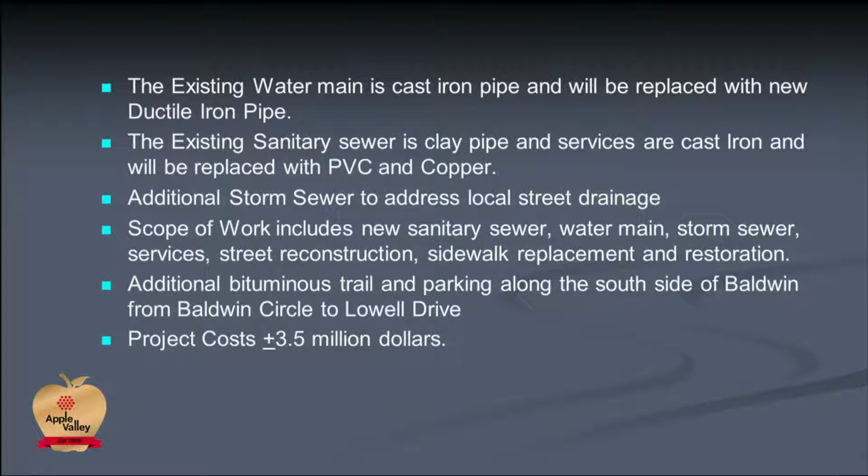Project cost, this is approximately $3.5 million construction project. And I really want to key in on something very important as part of this project, not just nuts and bolts. Like I mentioned, we bid and awarded the project for 2019 construction, so it's under contract to start. Funding for this project is derived from the city's road improvement tax levy, so you are not assessed.

There are no assessments. There are no costs to the residents. This is something our mayor and city council has pressed as a very important element to the city of Apple Valley. We do like to stress that because sometimes that's confusing to people that move here. That's a hard concept to get a hold of, and it's actually very rare that cities do not assess for this level of work.

So there are no special assessments, just to be clear. We have had people come to meetings and want to know what it's going to cost or what their assessments are, and we have to reiterate that maintaining no assessments is an important goal of the city of Apple Valley. So if anybody hasn't been at the meeting, like your next door neighbor, please just remind them, because sometimes they don't believe it, but it's really true. Yeah, that's a key point.

So, project area: you've got the mailers, we've got maps. The project limits are Baldwin up to Elm, over to Hopewell, everything in between.

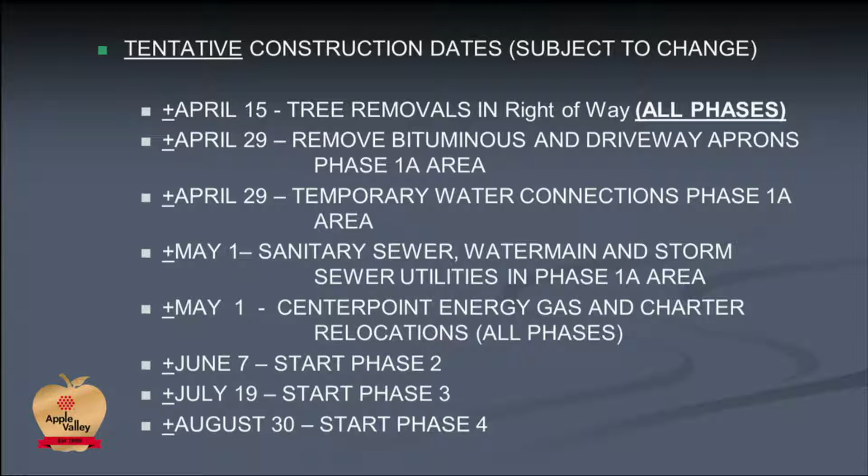And then, like I said, with the big picture, those are some of the tentative dates for you on phasing. So if you know where you live, you kind of have an idea when the real heavy stuff is going to start for you. During this whole process, one of the keys, we're going to be notifying you in advance. And in advance can mean 1 day, 2 day, 3 day, 7 day. It's going to vary depending on the type of work. But you are going to receive a lot of notifications from Tom.

Door hangers, we've always found we use websites and social media. We've done a whole bunch of stuff. The most effective to this day, even in a day of technology, is to put something on your front door as fast as we can - still the most effective means. So a lot of you probably go in and out of your house to your garage, and you may not even use the front door.

We communicate to Tom what your needs are. Tom's still going to do that, but if you have an individual need, let him know. Communication is key. Go to Tom. Go to Tom for everything you can.

You're going to see a lot of notices. There's going to be different notices that when we're pouring concrete, maybe you can't get in your driveway for a little bit, or this deep excavation, so you're going to have to not be in the 200 feet of roadway for an 8-hour time, or there's going to be a variety of notices for you guys. But Tom will be notifying you pretty regular. You're going to see a lot of them, and that's the key. We want to communicate with you in advance of things over and over, and if there's an issue, Tom's going to be the person you're going to want to communicate with, and he's going to communicate back.

You can go on the website. Usually website, we post weekly. It's not daily. Last year what we've done is after we hand out the notice, we'll go ahead and put it on the website. So, if you see your neighbor's got a notice and you don't, and you want to know what's going on, you can go to the website and it'll be there.

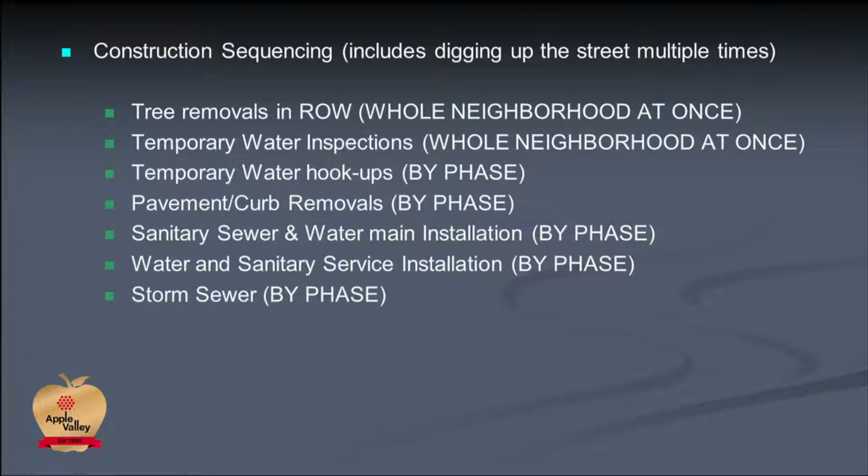I do have to mention that because it's something we take for granted as engineers that deal with this a lot, but a lot of folks have not seen that or been a part of it. So it is part of the process.

Once the utilities are in, then what we do is excavate the street. There's a lot of poor soils between the pavement and that. We'll excavate those and get those out of there. And that's really from back of curb to back of curb, and we'll do that by phase. Then we replace that material with a new aggregate base.

Nothing's changing on the street width, so we're keeping all that, the 28 foot. Once the aggregate base is down, then we have to pour curb and gutter. One of the things I want to point out, currently you have the rollover curb and gutter, it's kind of flat. All of our city streets in the neighborhoods that exist have been changed to what's called a B-style curb. It's the stand-up curb. So we'll have a nice drive apron and a nice opening. It makes plowing and parking and maintenance much easier than the rollover stuff. So it is a big change, and it does function a lot better.

So in the older neighborhoods where people aren't moving driveways like new neighborhoods where you don't know where they're at, this is a common changeover.

Sidewalks, like I mentioned, they're going to be 5-foot replacement instead of existing 4, and it's held to the inside of the road, so it won't be encroaching back towards the house side. It'll be encroaching towards the street side.

5 foot is actually, we can get by with 4 foot for ADA, but 5 foot maintains better. You can walk by people without feeling scrunched. 4 foot gets really tight, and you know how it is in the winter when you don't fully snow plow it or use your snow blower on it. It gets narrow. 5 foot is nice to get by, so it is an improvement. And we hear a lot of people do. It's hard at first, like, oh, I got to shovel more sidewalk, but in the end, actually, it is a much better amenity to the neighborhood.

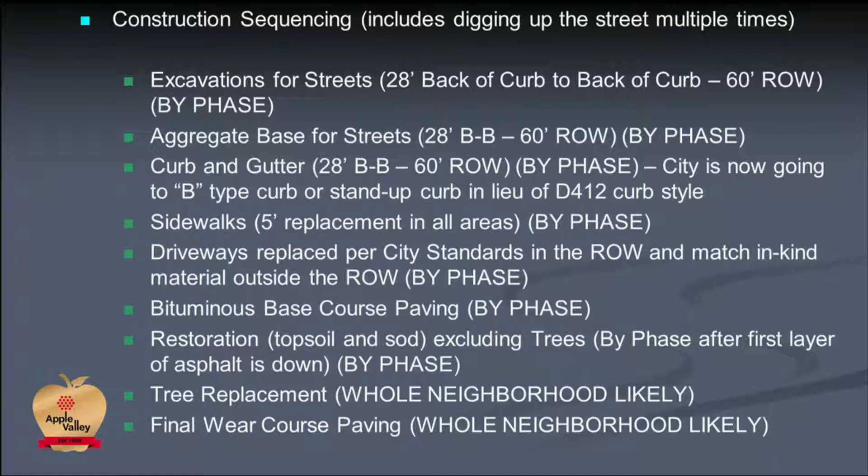We like those planted outside of the right-of-way on the replacement. Keenan has a sheet for the species, very critical. As some of you may read the news, the city of Apple Valley has emerald ash borer. It is an invasive species.

One of the things I think our natural resources group does a great job with is they promote diversity of trees. We don't want to go back into the neighborhood and plant one type of species over and over, because there's the risk at some point you could wipe everything out. Like emerald ash, you'll see areas of town where the whole area has to be cut. Keenan and his group has a great list of diversity of trees that work well.

So that's nice, think about that when you do your replacement. Get those forms back into Keenan. It is nice, we have a contractor with a nursery list, so we've got to make sure all that stuff's available early. The earlier, I think you had May 1st. Yep, the sooner we can get what you want for a species, then we can make sure we get all that stuff addressed with our contract with them.

You'll be out at the Eastview High School at the Home and Garden Show on Saturday.

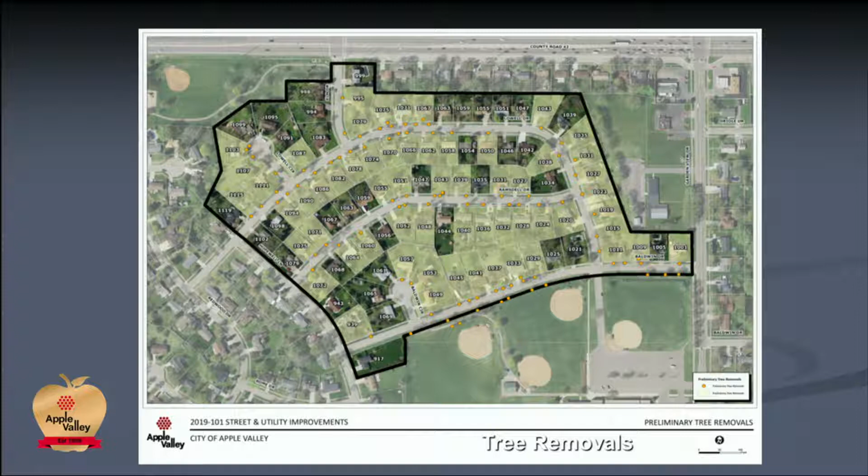So we're going to replace those with diversity when we do the trail. Are those lilacs? No, I don't believe so. Oh good. There is a couple trees in there that we can walk through in detail, I don't remember each specific one, but yeah. Are the yellow dots the ones you're referring to? Yeah. We've got a more detailed plan that shows some of the ones that have to go.

Tree replacement forms, Keenan's got those here. Make sure you get those in, those are important. I do want to get into some of the contractor items, more than just the specifics of the schedule.

We do have working hours: Monday through Friday 7 a.m. to 7 p.m. for equipment running and disruptive activities, Saturday 8 to 5. No Sundays and no holiday work allowed.

There are times that we do grant a little variance. There's been instances where if there's a large prediction of rain, say on a Wednesday, and these guys are in a really tough digging spot, we're going to make a decision to allow it to go. Tom will communicate. Sometimes we just have to bend the rules, but it's for the benefit of everybody. If we don't allow them a little bit of extra working time, we could have bigger issues. So there is time that we flex, but we only flex if we have to.

If you have concern about noise, talk to Tom. This is going to be a noisy, disruptive construction project, but talk to Tom and communicate that to him. We do have instances where it isn't working, but everybody does their best to keep this thing going. Like you said, we've got a short time frame, and it can be disruptive. We're not going to sugarcoat the fact that it's a disruptive summer season.

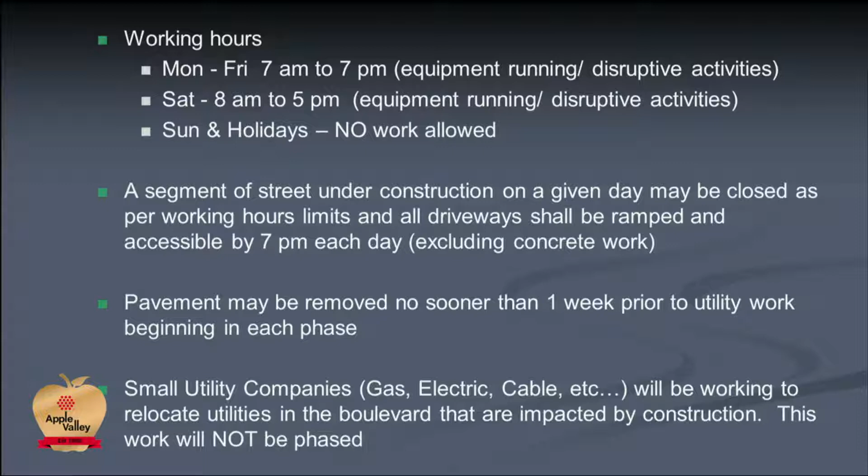Small utility companies, the gas and electric, will be working to relocate utilities ahead of us. One of our biggest delays on projects is having their stuff in the way, so they will be working in all phases to get out of the way. We can't have gas crossings and things in our way when they work, it slows things down and it's dangerous. So they will be working throughout the whole project.

One of the bigger items that have come up, and this is critical, Tom will work with you to coordinate private items in the right-of-way, such as irrigation systems, dog fences, shrubs, and pavers. They need to be removed by the residents prior to construction. The city is not responsible for the cost to relocate privately owned facilities in the right-of-way.

Our staff will send a notice to property owners ahead of scheduling, letting you know when that needs to occur. We give you as much time as we can. We understand it's a challenge to move things sometimes, and irrigation tends to be the biggest item. If you have shrubs or bushes you want removed, just communicate that to Tom so it can be dug up. Otherwise, do your best to get it out of the way in advance, and we'll give you advance notice.

In order to maintain not having special assessments, that's a cost the city can't keep reabsorbing if it's not public infrastructure in that right-of-way. So that's a big item, and it always brings most of the questions at the end: coordination of irrigation, dog fences, and miscellaneous stuff. But that's something we can talk with you individually about.

I do need to make a point about safety and access. This is a work zone. It will be disruptive. It's going to be noisy. There will be trucks, there will be dust, there will be vibrations and noise.

Please make Tom aware if there are special facilities, daycares, or special needs, sometimes people need access with special vans that ride low. There are all kinds of circumstances, so please communicate those things to Tom. The more we're aware, the better we can accommodate. So if there are special needs, let us know.

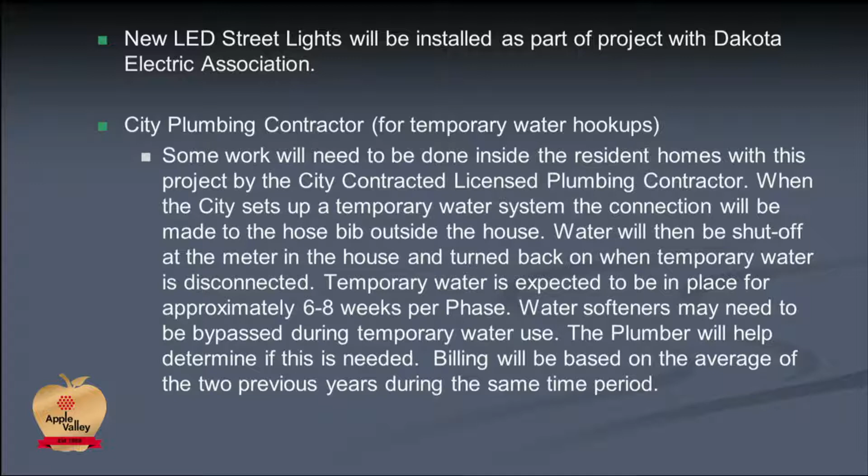Whatever time you're on the temporary water, yep, we'll keep track of when you go on temporary water and when you come off. So we don't do it for the whole duration of the projects, only during the time that you're on temporary water.

Garbage pickup. Garbage pickup is Tuesdays, and the contractor is responsible for the refuse hauler or the garbage company's accessibility to the container. So if it's under construction, your duty is to take the garbage out as you normally would. It is nice to get it out the night before.

I understand that this is an early pickup. Help them out because they have a system. You will get the same garbage can back. They have a system to make sure that your garbage gets to the refuse hauler. Your job is to get it to the end of the driveway like you normally do. And the contractor's responsibility is to make sure that the garbage hauler can get it away. It is a lot of coordination in the background, but it's important for you guys to understand that everything still functions. It just might be a little disruptive for a bit.

Mail is the other difficult one. We are going to provide a temporary mail delivery setup. We are working with the United States Postal Service. They tend to dictate the terms of the mail. We don't always have answers at this time, but we will work with them. They don't deliver in a construction zone. So there'll be some temporary mailbox set up, and I'll show you a map of where it worked from previous. They haven't finalized it, so it may move, but at this point we've got a couple locations.

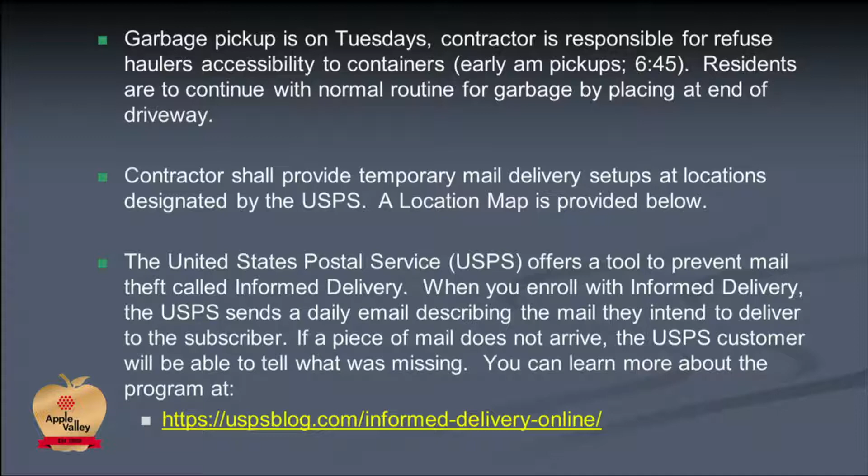If you would like that and it makes you feel better that you're going to a temporary box, a lot of people have said in the past it's a great tool to feel reassured about your mail. So we have put that out there. Our police department was kind of promoting this for a couple years too because they noticed that it helped with theft. So that's why we're bringing it back up. We haven't really had instances, but people get nervous when you have a band of mailboxes in one spot. So we like to put that out there.

Temporary mailbox locations by phase. So the post office has not signed off on this yet, but what we found is they want to stay out of the construction zone. They need a safe place to pull up, not in front of somebody's driveway.

When we put the temporary bank of mailboxes by phase, it has to be in a place that's safe for residents to pull up and get their mail without disrupting people's front yards. The two locations identified were one we used last year on the corner lot that worked really well—cars could stack up, it wasn't disruptive—and a side lot around the corner from Lowell that also worked. Those are tentative for now.

Tom will get you a very detailed map as we get that going. So locations 3 and 4 are down below, and 1 and 2 are up at the corner—the pointer doesn't show it well. The reason is, when we're disrupting phase 1, all those folks on phase 1 and 2 need a mailbox location, and we like to leave them there as long as possible. We don't want to move mailboxes repeatedly—we try to get duration so you're going to the same place. It's disruptive for the postal carriers and for residents to keep moving boxes around, and it's costly for us because we have to pay for all those moves.

So, the contractor will take the mailbox down and give it back to you—that's your possession, they don't store it. The reason we don't have the contractor store it is if it comes back damaged, or not in the condition it went out. So Tom and Jordan, you guys give them back to the residents, and you store your own personal possession. Can I take my own down? Yep, if you want to. We put the temporary ones up—just find out when they're going to do that so we can take them down.

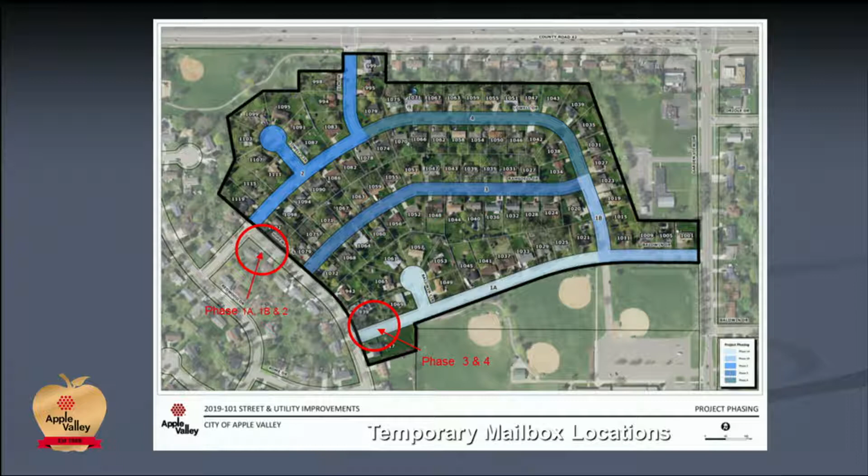Those were the bigger items I had. I know Jordan wanted to mention one thing about vibrations in construction—his insurance company says one of the biggest items that always comes up is vibrations and damage. So, Jordan, go ahead.

Evening, everyone, thank you again for coming. Looking at the map for vibrations, as Brandon mentioned, we will be digging past your house a number of times—it's all part of the process, but you will feel vibrations in your house. I always liken it to fireworks on the 4th of July: you see it, hear it, feel it, but it's far enough away that it doesn't harm you. Similar to the map, there's an alert zone in red and a perception zone in yellow—if you're in your kitchen and feel it, that's perfectly normal. The techniques we use are industry norms, not just here but statewide.

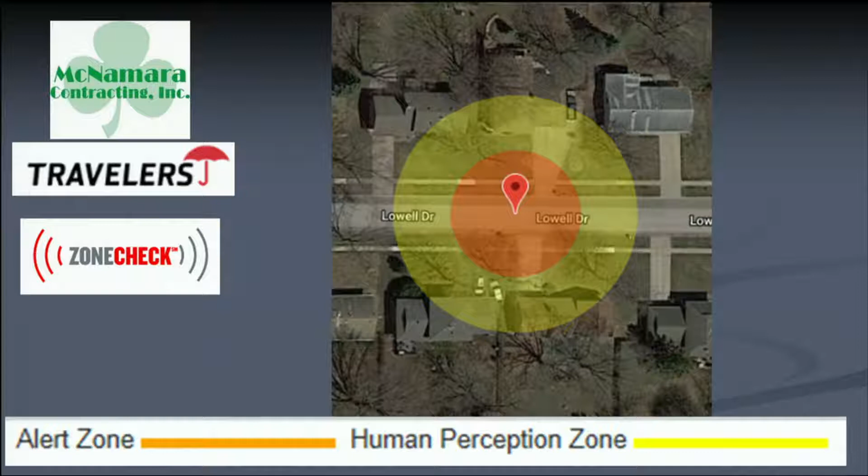If you have any other questions, I'll hang out a little bit afterwards. Otherwise, Tom is the main point of contact in the field. Just so you're aware, before the project even begins we video, photograph, and log everything we're disrupting ahead of time. We do get claims for damage—Jordan's right, vibrations comes up a lot, along with cracked sidewalks, which get replaced, and cracked driveways. We document that stuff. If we damage it, we'll replace it, but if it was already there we can't fix everything, otherwise it becomes open-ended.

So we do document a lot of things in advance. I want to show you some pictures of some of the things I discussed, and then after that we can open it up for questions.

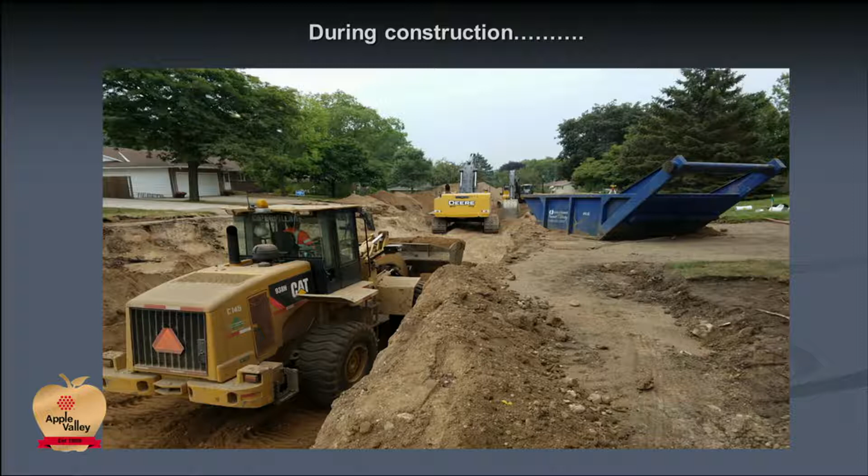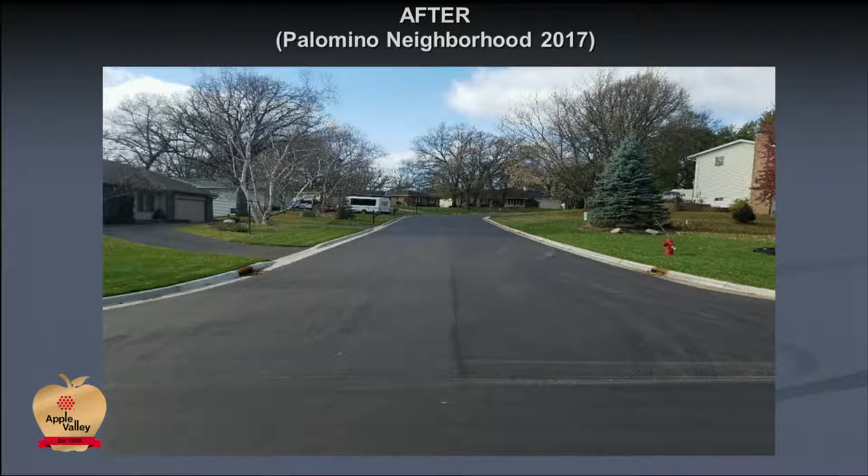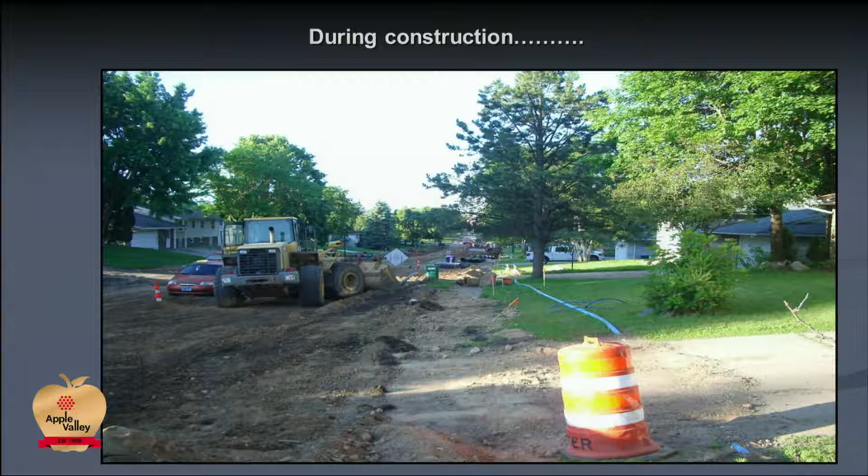The nice thing is this is when it's done. This is when I mentioned the city standard sidewalk and drive entrance, the B curb, the stand-up, sod, restoration, all those kinds of things. It will be a long summer, but it goes fast, surprisingly. We all commented it was a year ago to the day that we were here having the same conversation. Time flies.

Communication is the key. If you guys have concerns, communicate it, and we're going to communicate all these things as much in advance as possible. I don't think I missed a whole lot of the bigger picture stuff.

On that last picture, that is the approach. Every address will get that approach, unless you have a bituminous driveway—even then, you have a sidewalk that goes through everything. So everything will be a concrete apron out front, for consistency.

You can ask questions of us up here, you can grab Tom individually, you can look at the maps. We'll leave it open. Really, that's what we wanted to get to—give you the overview and then open it up.

Brandon, the United States Postal Service has mailboxes that have keys. Do you know anything about that? We have some in part of our neighborhood. The question, if you didn't hear it, was about the mailbox, like the community boxes.

Some of them don't have individual boxes, but they have lock boxes. The Postal Service really dictates the mail, and I'm not sure if we're able to request what the post office puts in. I'm not saying everybody wants to do it, but if there were a lot of people that wanted to, thinking about the future and mail security, you know.

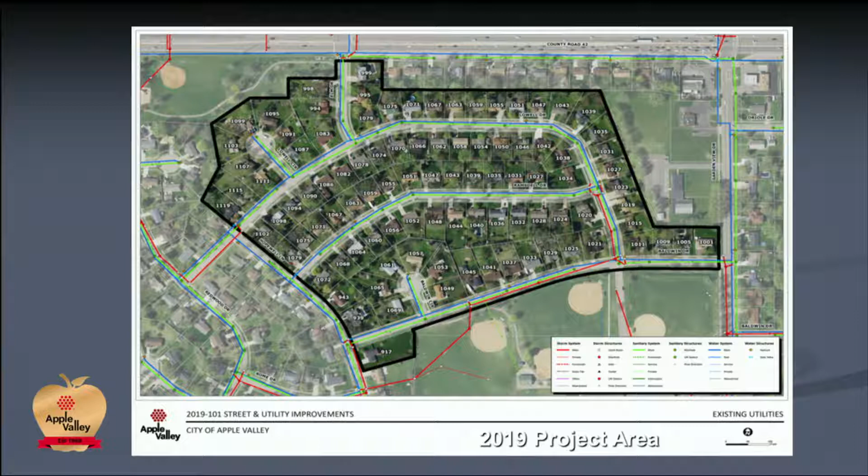Do you think phase one would be done around June 7th? Our goal that we had set was phase 1A and 1B to be completed around June 7th. So the idea was 1A first and then 1B? The reason we did 1A and B was because of the school.

We want to get the sewer in up to Baldwin so that we can get the school done. We didn't want to tear up 1B because we want school buses to be able to run into the school without driving through the construction zone. Otherwise, the school has nowhere to go and it starts to create other disruptive problems elsewhere. So we're going to do 1A first, get it done, and then the buses will switch so that the intersection remains open. That's why we did 1A and B. So does that answer your question?

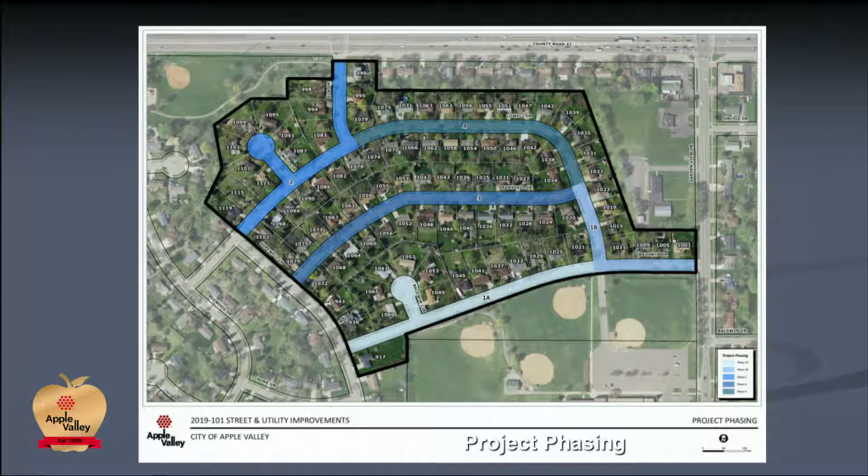So I can watch how they're going. And sometimes we plan this and the school then makes adjustments—their transportation guy will sometimes make adjustments.

Last year, why did they put them over the school property, or can they drive off? We did, but we can't access it during construction. Sometimes the direction of the mail carriers impacts it, with the side of the car that they're on. So there are little factors like that—we looked at places that we thought were logical, and the USPS says no. So I wish I had a direct answer, but every time we think logically with the USPS, they sometimes throw us for a loop.